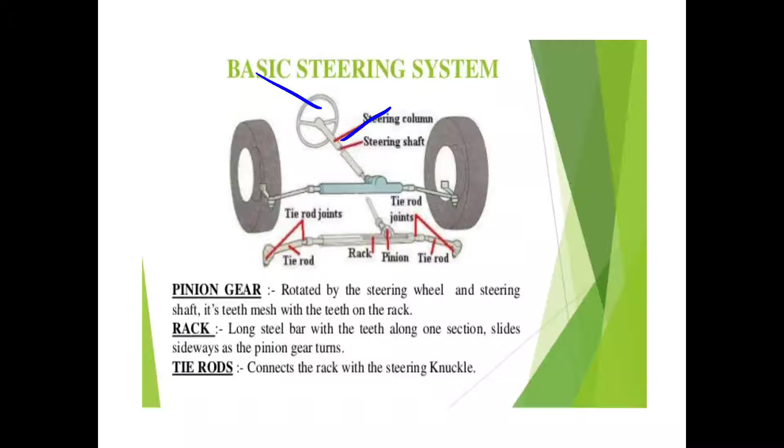This is the steering wheel which is operated by the driver. This is the steering column which is connected to the steering wheel. The motion of the steering wheel is directly transmitted to the steering shaft with the help of this steering column. This is the steering shaft. In this section a gearbox is provided which may be worm and worm type or rack and pinion type.

Finally, power distribution goes to one side wheel and the other side wheel. Here is the arrangement provided, that is rack and pinion. This is the tie rod at the right side section, this is the tie rod at the left side section, this is the tie rod joint and this is the tie rod joint.

So see, the pinion gear is rotated by the steering wheel and steering shaft. Its shaft teeth mesh with the teeth on the rack. This is the pinion gear. Next is the rack, a long steel bar with teeth along one section that slides sideways as the pinion gear turns. Actually the rack and pinion mechanism will be discussed in the next slide.

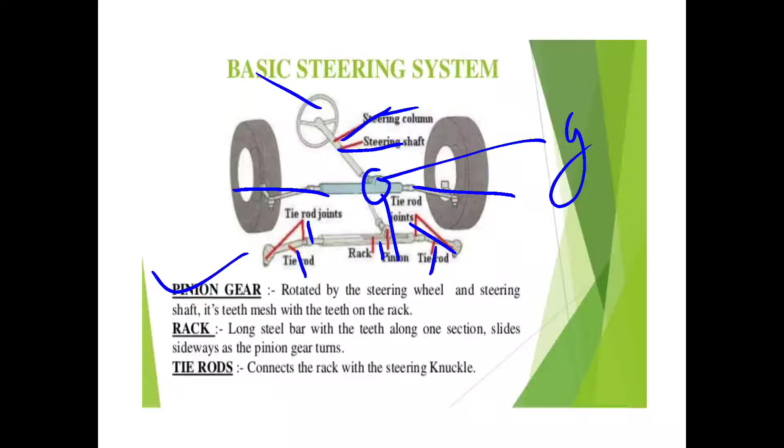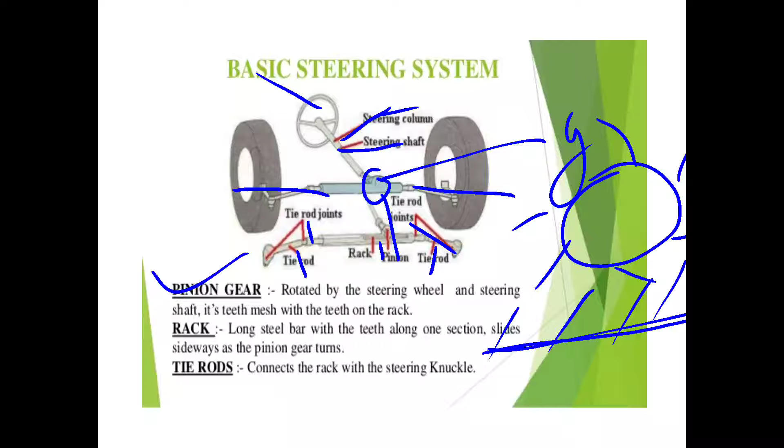It will look like this, and another one is a wheel which has a number of teeth on its periphery. So this type of rack and pinion mechanism - next is the tie rod, which connects the rack with the steering knuckles. So see here, this rack and pinion steering mechanism is generally used in tractors.

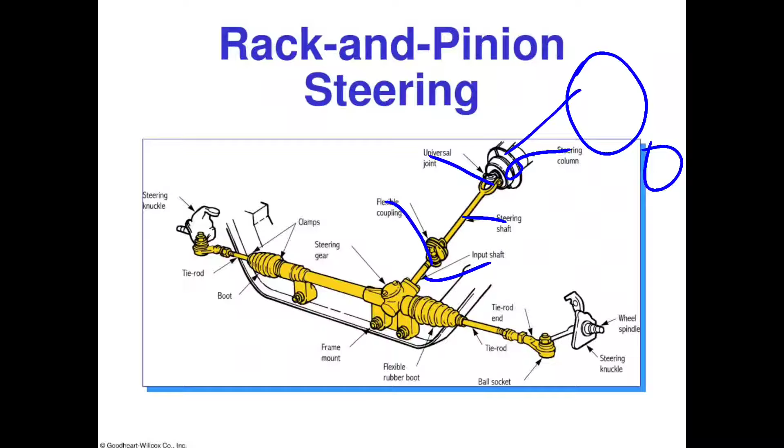These are the various components. This is the steering column, this is the universal joint. Here is also one wheel provided which is operated by the driver during the driving position. This is the steering shaft. These are the flexible couplings. This is the input shaft which transmits power from the steering column to the steering shaft.

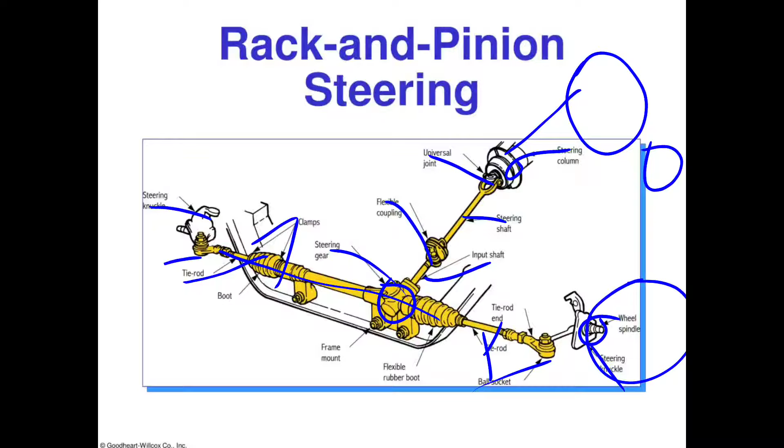These are the tie rods, right side as well as left side. These are the clamps which are used for clamping the section. This is the steering gearbox in which the gearbox provides motion to the right side as well as left side wheel during driving. These are the steering knuckles. These are the wheel spindles on which the wheel is placed. These are the steering knuckles and these are the ball and socket joints, provided on the right side and left side of the wheel.

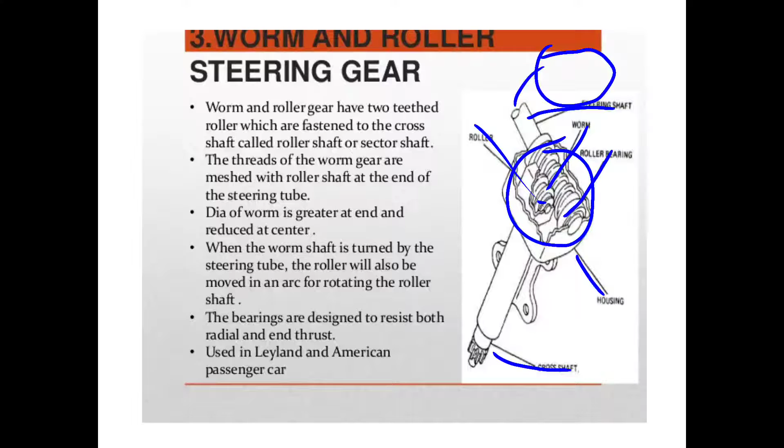From the steering shaft, here is our wheel provided, that is the steering wheel which is operated, and this motion is directly transmitted to the worm roller bearing and then to our right side and left side wheel.

So see here, the worm and roller gear has two teeth rollers which are fastened to the cross shaft. The threads of the worm gear are meshed with the roller shaft at the end of the steering tube. These are the threads which mesh with the steering tube. The diameter of the worm gear is greater at the end, reduced at the center section, meaning the diameter becomes lesser at the center than at the end section.

Next, when the worm shaft is turned by the steering tube, the roller will also move in an arc, rotating the roller shaft at this section. The bearings are designed to resist both radial and end thrust. The bearings are useful for resisting that thrust.

Used in Leyland and American passenger cars, it is also used in some tractors manufactured between 1960 and 1975. Some currently produced tractors also provide a worm and roller type steering box.

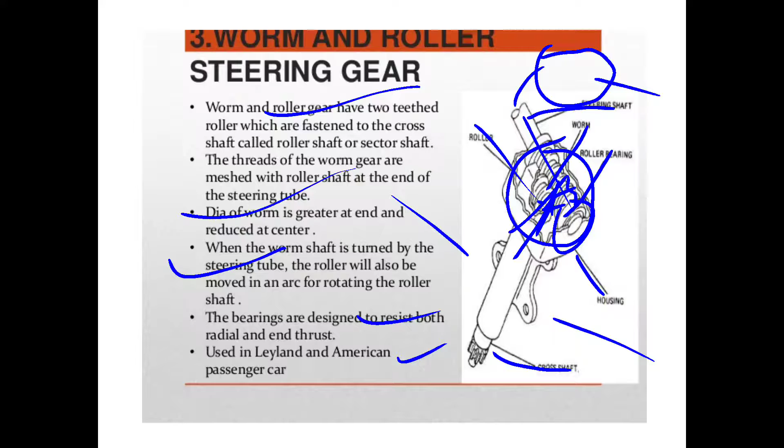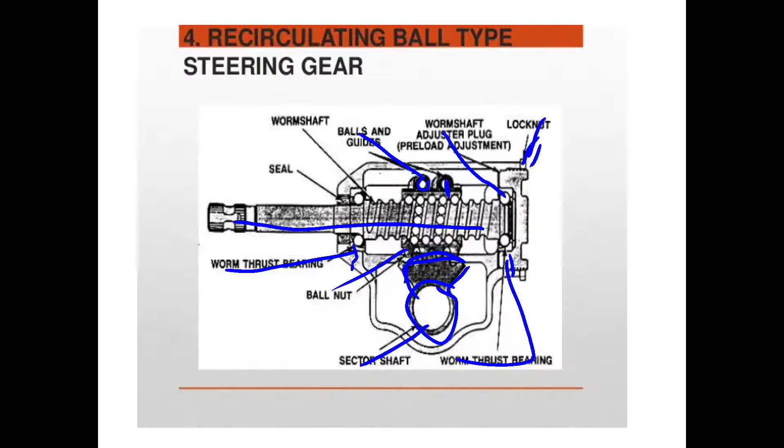So this type of recirculating ball type steering gearbox is provided in some tractors, not every tractor. Actually the rack and pinion type mechanism is mostly used in tractors.

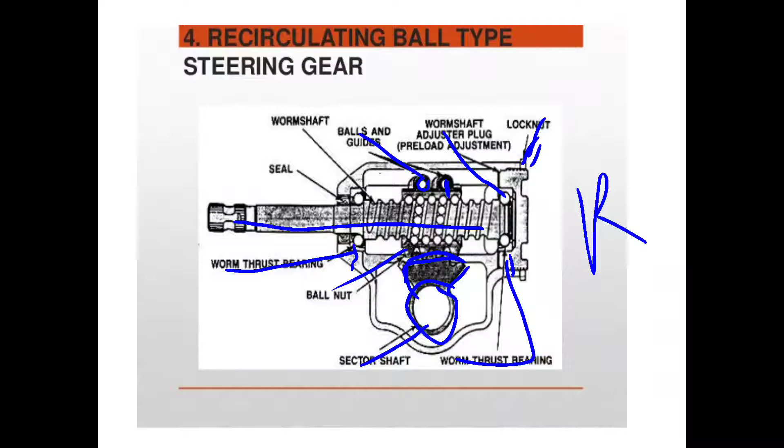So next is power steering. Before starting with power steering we must be familiar with Pascal's law. Pascal's law states that when applying pressure - consider this cylinder in which we have filled oil or any fluid - when you apply pressure on it, it will be distributed equally in all directions. On the basis of Pascal's law, our power steering system, power brake system, and hydraulic system should work. So let's see in detail how the power steering system works.

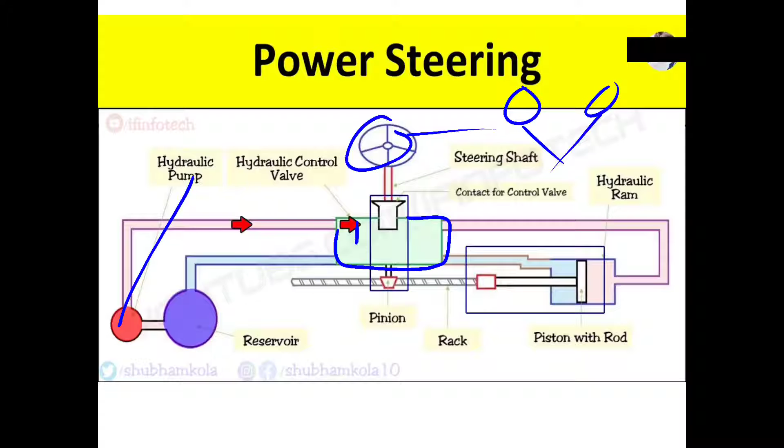Next, here is provided the hydraulic control valve, which controls the flow of oil inside the system. This one is the pinion, and this one is the rack, so rack and pinion mechanism is used here.

See here, this one is the piston with rod section. This is the connecting rod, this is the piston, and this one is the master cylinder in which oil flows. First, the hydraulic pump takes oil from the reservoir and directly transfers it toward the control valve. From the control valve, this oil goes to the cylinder.

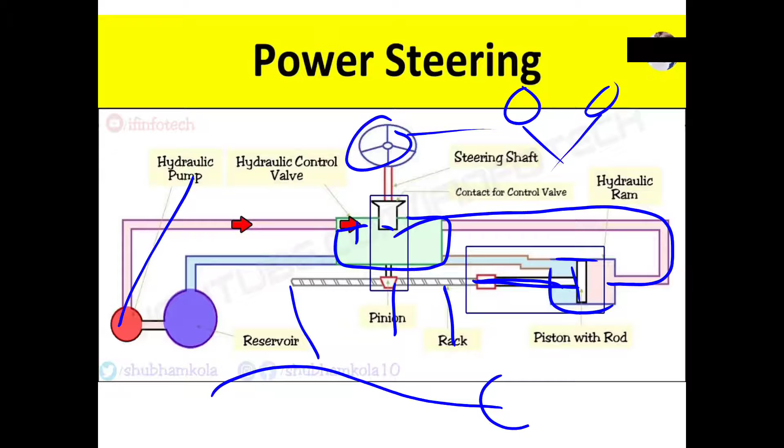When this oil goes to the cylinder, it will be under pressure. Due to this pressure, it forces our piston and connecting rod toward the left side. While it moves toward the left side, this rack and pinion mechanism operates our wheels at the right side as well as the left side, as per the requirement.

So the next concept is toe in, toe out, camber angle, and caster angle. What is meant by toe in and toe out? What is the importance of toe in, toe out, camber angle, and caster angle in the steering system? We will see.

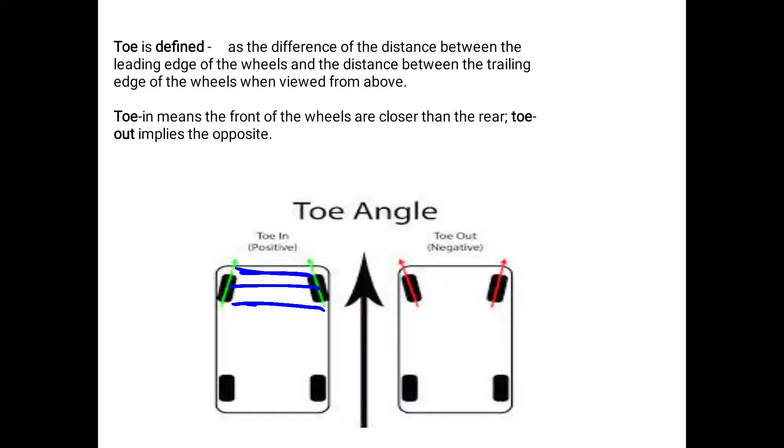Firstly, what is meant by toe? It is the difference between the distance between the leading edge of the front wheel and the distance between the trailing edge of the wheel, when viewed from above. See here, these are the front side wheels, this one is the front section and this one is the rear section. If you make the figure alphabetically, it will look like this.

An A-like structure is considered toe in, and a V-like structure is considered toe out. Toe in is positive and toe out is negative. At both wheels of the front section, the distance becomes lower than at the trailing edge as well as the bottom section. We call this toe in.

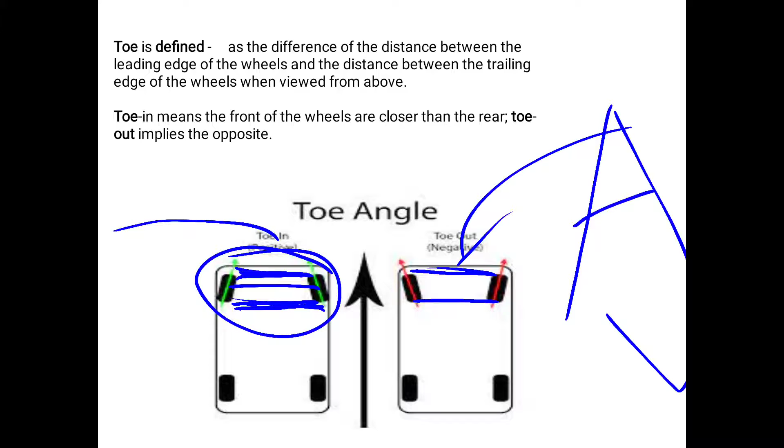What happens in toe out? In this case it is negative. The distance between the front wheels at the front edge becomes greater than at the trailing edge. We call this toe out. Toe in means the front wheels are closer than at the rear side; toe out implies the opposite. Toe in is opposite to toe out and toe out is opposite to toe in. This is the basic concept. Toe in and toe out are provided only at the front side of the tire, not at the rear side.

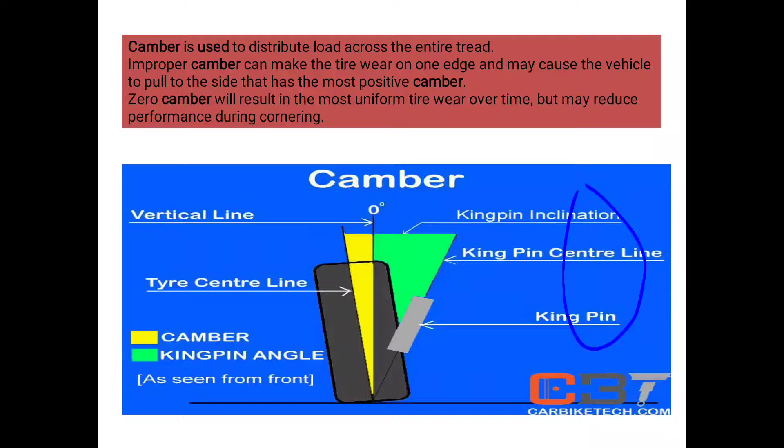So next is the camber angle. This angle is also important for steering purposes. How does it work? Camber is used to distribute the load across the entire tread. Consider this one is a tire in which we are provided treads. If you want to distribute the load equally across all treads, camber angle is necessary.

Improper camber can make the tire wear on one edge and may cause the vehicle to pull to the side that has the most positive camber. That means if camber angle is not provided properly, the tire takes load on one side. Zero camber will result in the most uniform tire wear over time, but may reduce performance during cornering. So diagrammatically, I have shown here the camber angle in degrees.

This one is the tire. This is the center line of the tire, and this is the vertical line. The angle between this yellow section, between the center line and vertical line, we call the camber angle. The camber angle is nothing but the angle between the center line of the tire and the vertical line.

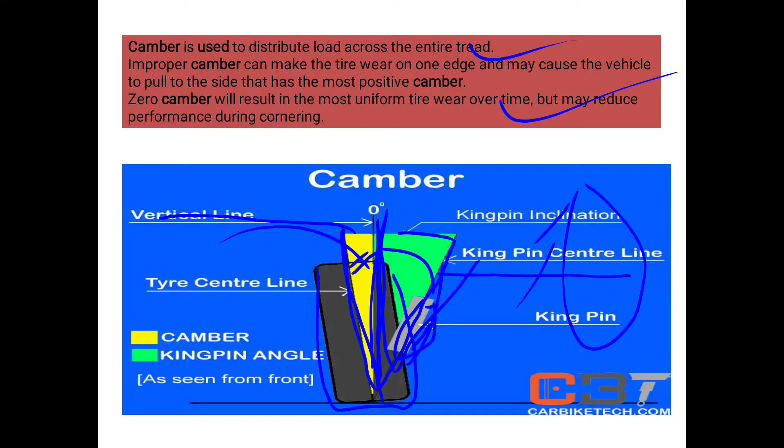And the kingpin angle: see here, this one is the kingpin, this is the kingpin center line. This is the center line of the kingpin, and this one is the kingpin inclination. The angle between them is called the kingpin angle, that is, the angle between the center line of the kingpin and the kingpin inclination. We will call it the vertical line and the kingpin center line. The angle made is called the kingpin inclination as well as the kingpin angle.

So next is the caster angle. This is also important for steering purposes. Its purpose is to provide a degree of self-centering for steering. The wheel casters around in order to trail behind the axis of steering. This makes a vehicle easier to control and improves its directional stability. For directional stability, we need to provide the caster angle.

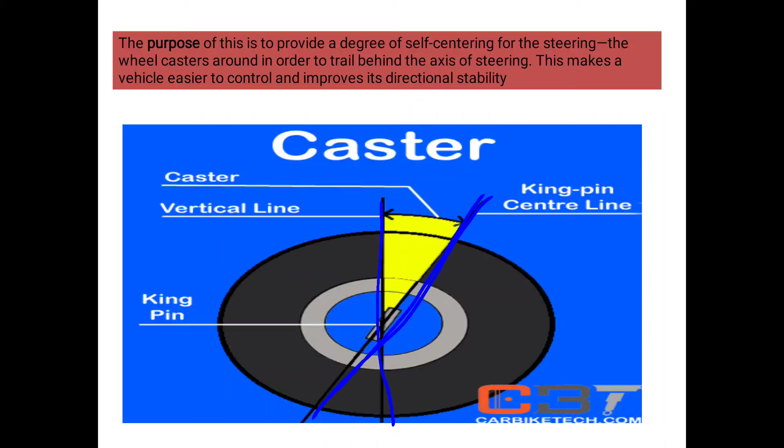So what is meant by caster angle? This one is the kingpin, its center line. This one is the center line, this one is the vertical line. The angle made between the kingpin and the vertical line, whatever it may be, consider it x. So we call it the caster angle. Thank you.